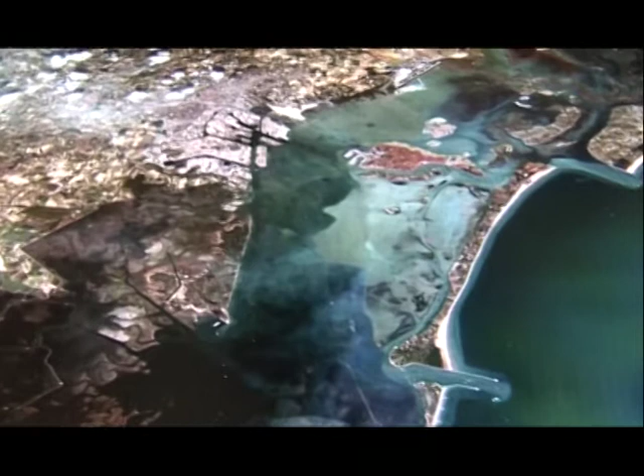Venice Lagoon is endowed with a unique environment in the world, an environment in which man and nature over centuries have maintained a delicate balance. We owe to the Serenissima Republic and its engineers and mathematicians many of the works that have saved this ecosystem from being buried in the mud, carried into the lagoon by rivers, as well as the construction of retaining walls to defend the city against the sea.

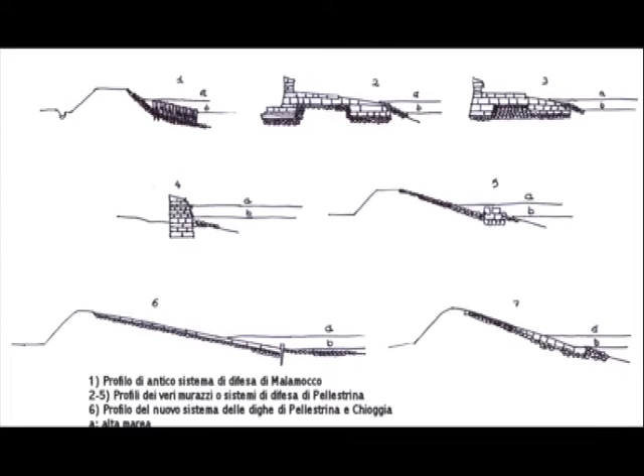But today, Venice is dramatically threatened by subsidence, the sinking of the lagoon floor, and by eustasy, the rising sea levels as the result of climatic changes. The phenomenon of subsidence of an anthropic nature was neutralized by a special decree in 1973. The decree prohibited the extraction of large quantities of water from the lagoon floor for the productive cycle of Porto Marghera's petrochemical plant.

The lagoon, 550 square kilometers in size, is connected to the Adriatic Sea by 3 entrances: the one at the Lido, the one at Malamocco, and the one at Chioggia. The lagoon is not a lake. The lagoon is a living body in which the balance of dynamics can be maintained only if they are looked after every day. The Lagoon of Venice is the only type in the world which has lived for 1,000 years with this balance. It managed to do this because there were certain rules imposed by its government.

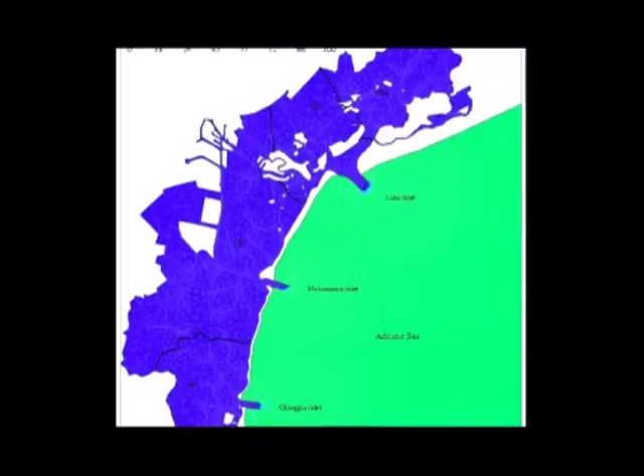This balance between the earth that enters the lagoon from the rivers and the earth brought in by the tides of the sea constitutes an environment that is a kind of natural sponge which stays that way if it is taken care of day by day. Since the fall of the Republic of the Serenissima, this maintenance has been interrupted. Grandiose projects were launched, which in turn initiated the devastation of the lagoon.

The tides last 6 hours. In 24 hours, 4 times. This lasts about 12 to 13 days. Then, in the period of the half moon, as we fishermen call it, comes what we know as dead water, which lasts 2 to 3 days. So, in reality, the danger of high tide periods covers only 1 week. This high water is influenced by the Scirocco winds as far as Venice is concerned, and by the Bora winds as far as the Chioggia base is concerned.

When we have the largest inflow or outflow of water at the 3 entrances to the lagoon, we have a total volume of about 20,000 cubic meters a second going in or out. I always give this example. The outflow of the Po River, on average, is about 1,500 cubic meters a second, and at its maximum about 10,000 cubic meters.

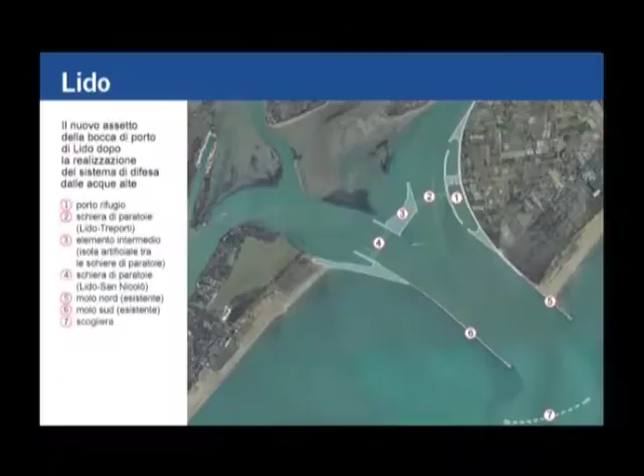The Lido entrance is used to allow passenger liners to pass in and out of the lagoon, and has a depth of about 12 meters. The Malamocco entrance is used for freighters, container ships and petrol tankers, and has a depth of about 14 meters. The entrance at Chioggia is the lowest, about 8 meters, because only fishing vessels pass through there.

Once you increase the opening of the entrances, as the project of the Mose does, then a lot more water enters the lagoon. Of course, it is true. We have high water more frequently now than 100 years ago, and we have a higher sea level. In fact, over the last 100 years, we registered a rise in the level of the sea of about 23 centimeters.

The enlarging of canals, making them deeper, straightening canals instead of keeping to the morphologic course of the lagoon, means you are putting more water into the lagoon, which means exposing yourself to more flow of water coming in and out of the entrances, which means the degrading and removal of silt, a vital component for the survival of the lagoon. 120 to 130 years ago, the entrances were completely different. They were not reinforced, there were no piers, and the depths were far inferior, perhaps 3 to 4 meters only.

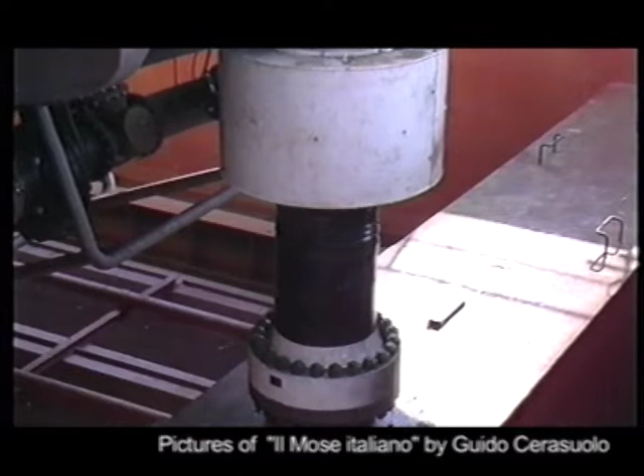The New Venice Consortium is a pool of major private enterprises which has been granted the exclusive rights for all projects designed to safeguard the Venetian lagoon. The consortium has insisted on the use of an impressive system of mobile and submerged sluice gates known as Mose.

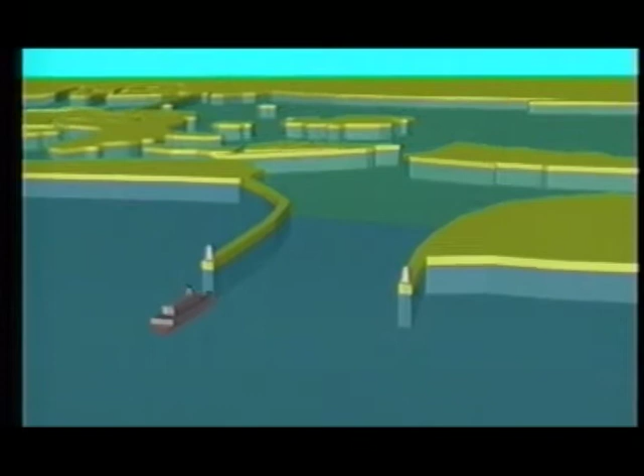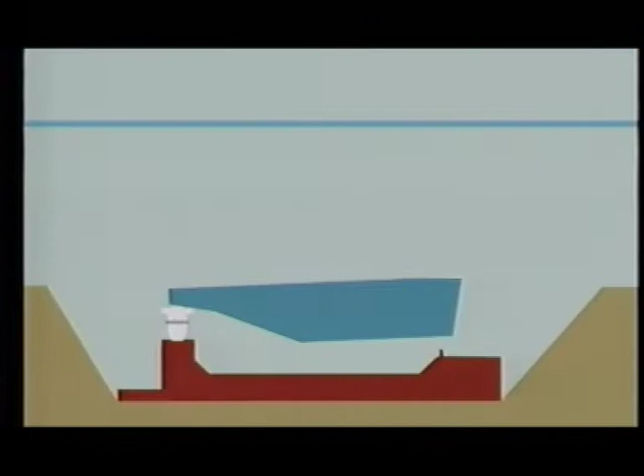These sluice gates, hinged on concrete foundations, will be positioned on the seafloor of the 3 lagoon entrances and during normal conditions will rest on the floor inside container-like structures called caissons. They will go into action when the sea level rises more than 110 centimeters above the average level. With the help of a compressed air system, the sluice gates will be emptied of water, which acts as ballast, and they will rise out of the water on rotating axes.

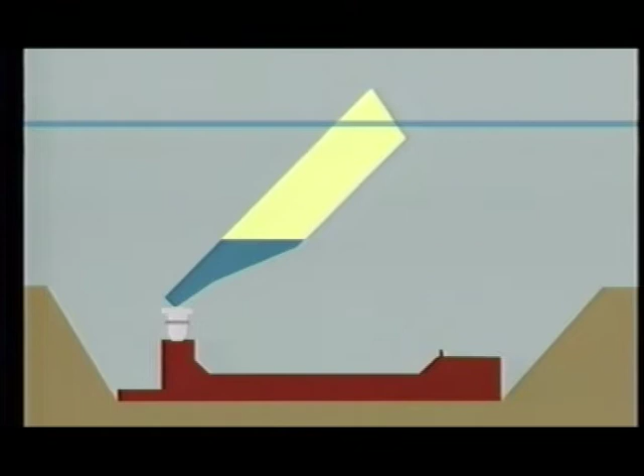It is these rotating axes, already in an advanced state of construction, that have caused more than perplexity among experts, politicians, and ordinary citizens who are opposed to the Mose. Over the last 1.5 centuries, Venice has suffered high water more frequently and always higher. Now, the real problem is to understand why this has happened and to remove the causes.

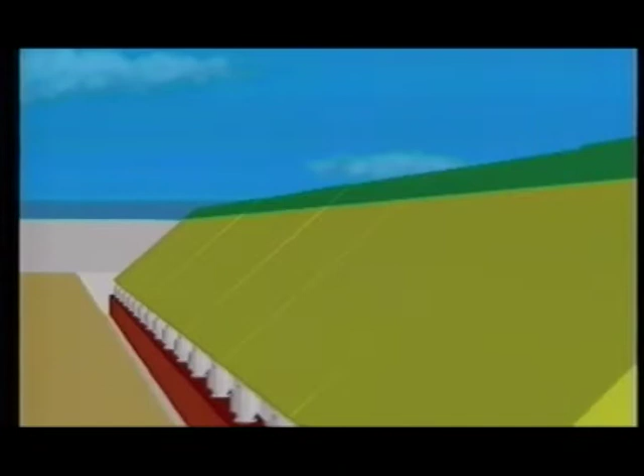The Mose, however, does not ask itself what is the cause, but intends to solve the problem of high water by manufacturing huge sluice gates, which for simplification are submerged and are raised when the level of the sea exceeds 110 centimeters above the normal level. In fact, all the studies by experts and environmentalists show the general conditions of the lagoon, little by little, have been modified as the result of human intervention. High water has become frequent.

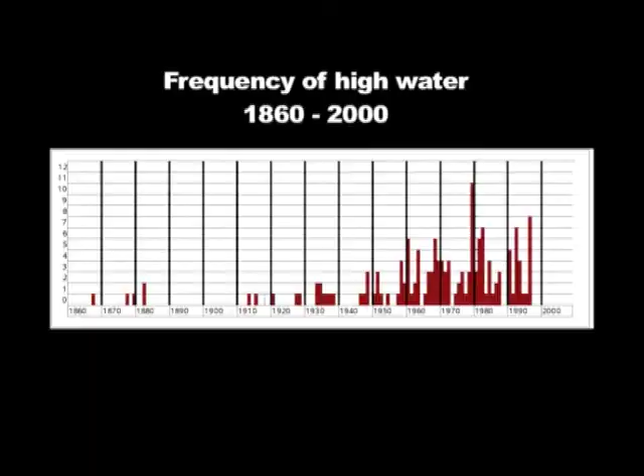This means when we dug out the petrol canal, it became a huge highway for the tidal waves. The same effect when we built the retainer dams on the lagoon entrances and extended the depths of the entrance floors. When we built Marghera, taking away an enormous part of the lagoon from tidal expansion. When we filled in parts of the lagoon to make an airport, and then the first, the second, and the third area of land reclamation, where there is supposed to rise a third industrial zone.

Little by little, as we did all that, the frequency of high water increased for a very simple reason, and that is that the lagoon basin was being reduced in size. We have a sea which every 6 hours comes in and goes out. So if more water comes into the lagoon and the area of water is reduced, the water level rises.

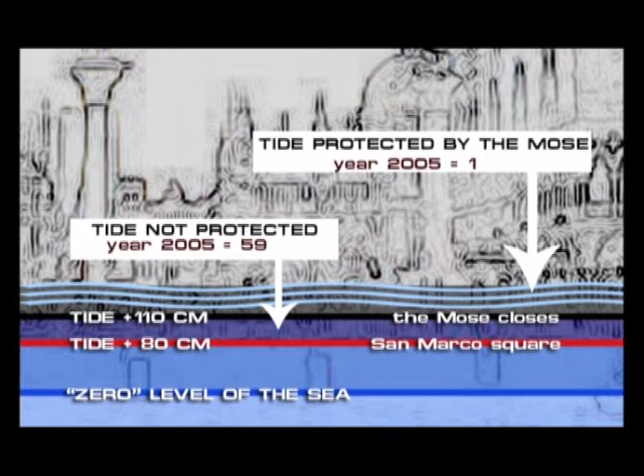I have to explain something. When we talk about 110 centimeter average tide, we refer to a zero average sea, and we don't mean the level of water rises 110 centimeters in the city, which would mean water to our armpits. In fact, with this 110 centimeter tide, we would have water only in the lowest part of Venice, like St. Mark's Square, where we would have about 30 centimeters of water, and in the rest of the city about 10 to 15 centimeters.

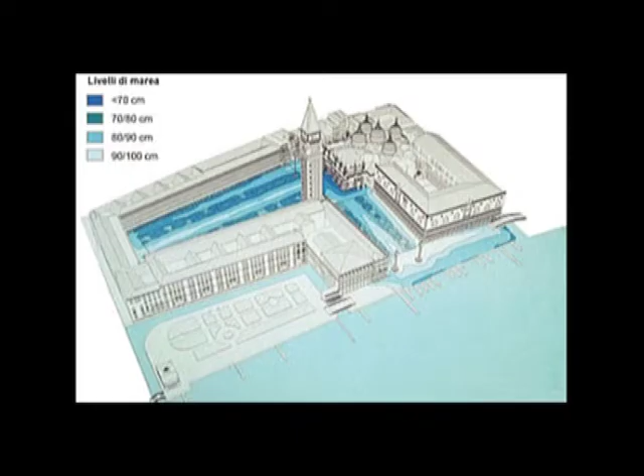Of course, 20 to 30 centimeters of water is a problem for those who live in Venice and have to wear rubber boots, with streets flooded, water in shops and in the ground floors of houses. But this is not yet a flood disaster, as we saw in Mestre Marghera at the end of September 2007. What would have happened if the Mose was closed on that day, and the water would not have been able to exit the lagoon? That would have been a double disaster, both for Mestre and for Venice.

Those against the Mose want to escape this cycle of high water, but we want to do it by removing the causes. Today, there exist 9 to 10 alternative projects, which the municipality of Venice has finally analyzed, confronting one with the other and putting them in front of the Mose. The result was that from a point of efficiency, and I mean by efficiency the degree of protection from high water, environmental impact, cost and time of construction, the Mose ended up in second last position.

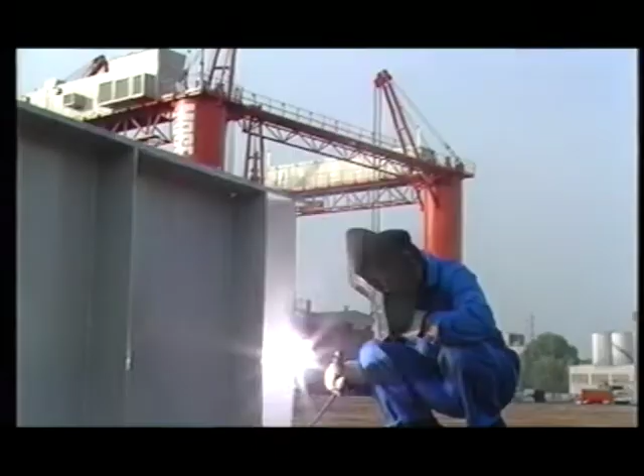One of the most scandalous points about the Mose is that it is not a project born and administered by the municipality of Venice. It is a project tendered out to construction companies for planning, for experimentation and realization, so violating every accepted administrative and economic rule.

But the most fundamental problem of the Mose is that it is an antiquated project, an engineering project whose concept comes out of the 19th and the 20th century. The Italian law, still valid in Venice today, specified 3 conditions adopted from the past Venetian Republic as basis for any intervention in the lagoon. Any project had to be gradual, experimental and reversible. Reversible in the sense that if one saw the effects were negative, it was possible to quickly dismantle the erroneous works, like in the case of the direction of a new canal or a particular shore fortification, etc.

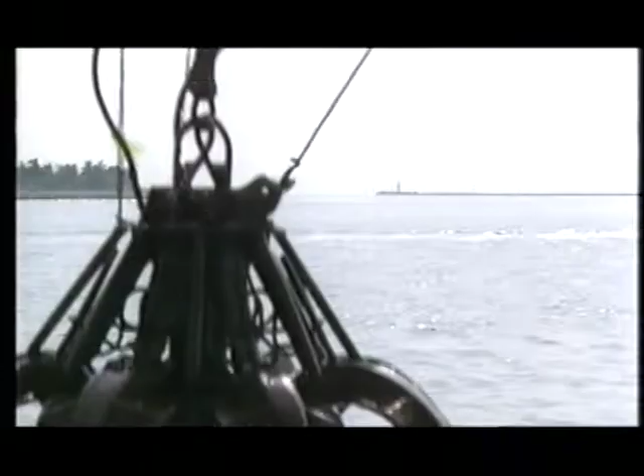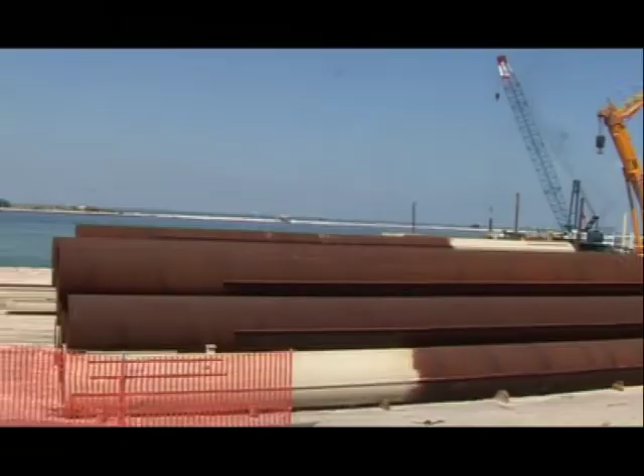The Mose is based on particularly heavy and massive techniques. At the base of the Mose are containers 60 meters by 25 and 15 in height, like a 5-story building in reinforced concrete. These containers holding the hatches of the sluice gates are installed as fixed and unremovable items. The Mose is a permanent project. Just think, the foundations are made up of 12,500 rods fixed below sea bottom at the entrance to the lagoon at a depth of 47 meters.

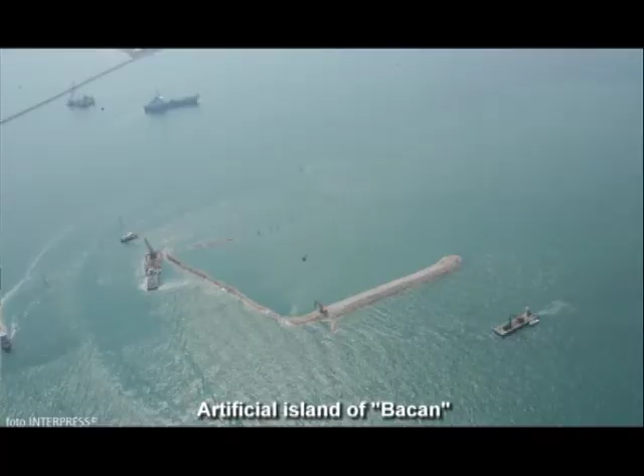Under the lagoon exists an enormous deposit of methane gas. So large, the constructors were forced to build a chimney stack on the artificial island they have built on the Lido entrance to air the methane, which would automatically invade the underground structures with lethal consequences.

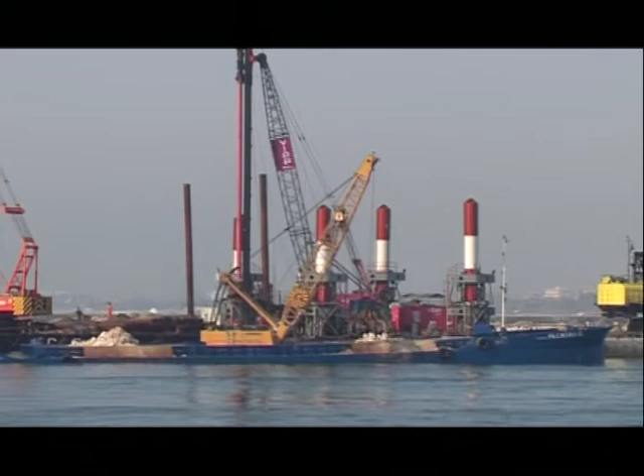Today we are completing the preliminary works of a mega project the size of which Italy has never seen. A project totally illegitimate because it has no evaluation of its environmental impact, which is required by Italian and European law. The works were authorized only by a mechanism of political evaluation, certainly not technical evaluation.

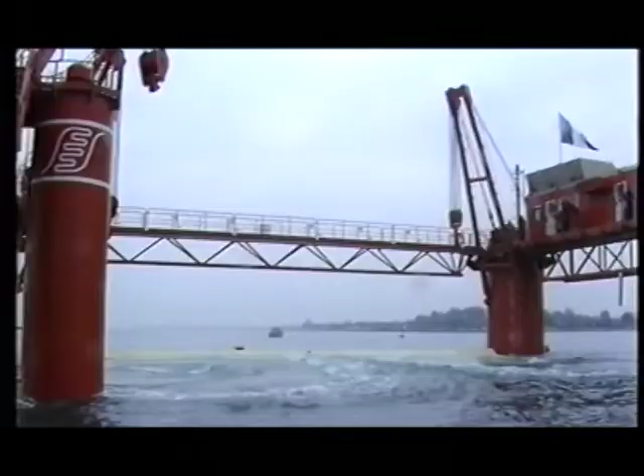The Mose was supposed to be designed in such a way that it would not alter the balance between sea and lagoon. This was done because in no way did we want this balance to be violated or become lopsided during the time when the sluice gates are not in operation. How could we achieve this result? Since the Mose has a flat and cemented seabed, it would be necessary to slightly reduce the openings of the entrances. The volume of water going in and out would therefore remain identical, since the seafloor would be dug out and the entrances reduced at the same time.

However, the velocity of water would considerably increase, as already happened after the creation of the Bacan Island. The speed of water impacts dangerously on the erosion of the seabed and the very foundations of Venice. At times, when the Mose is not operational, the quantity and powerful flow of water will be tremendous. Already now, with the first works, fishermen are saying that the currents have changed. The captains of the passenger ferries have also noticed this. And remember, we haven't even started yet placing the hatches.

The Mose will increase the medium and high water levels and will actually go into operation only when the high tide levels exceed 110 centimeters above the average level. It will only be ready between 10 and 12 years from now, and at the phenomenal cost of 4.2 billion euro.

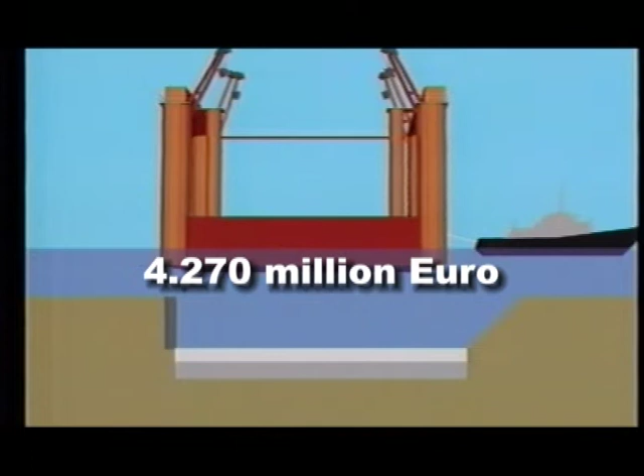Tried out as a model between 1988 and 1992, the Mose was initially financed with 435 million euro. Work officially began on May 14, 2003, when the former Prime Minister Berlusconi laid the first stone. Today the cost estimate has gone up to 4,270 million euro, and the project is supposed to be completed by 2011.

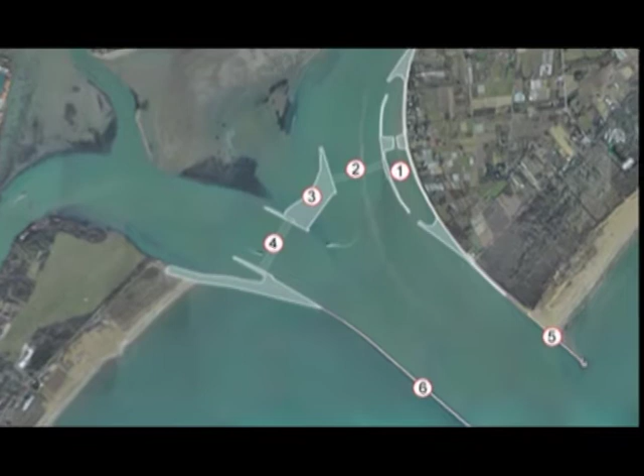The solution envisages 18 sluice gates at the Chioggia entrance, 19 at Malamocco, while at the Lido entrance, twice the size, there is this intermediary element, a real island between two formations of 20 and 21 sluice gates. We are therefore looking at a total of 78 sluice gates, 20 meters each wide, with a total length of

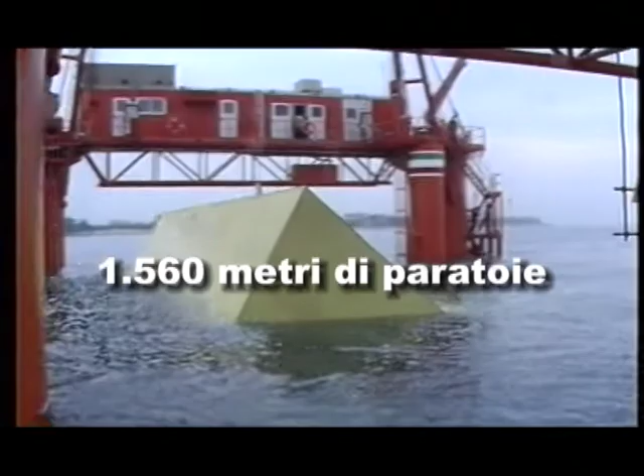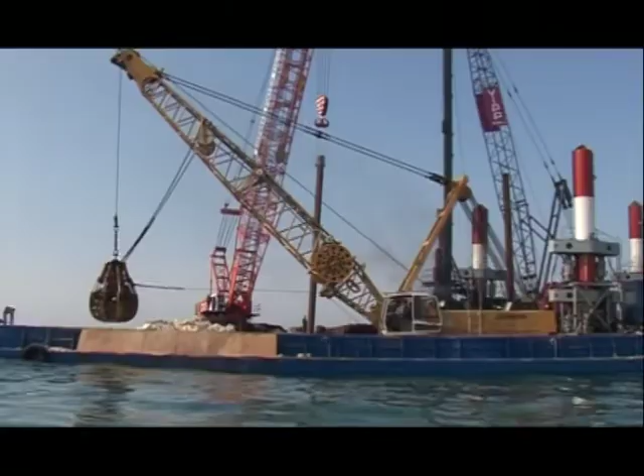1,560 meters, with heights that vary from 18 meters at the Lido and Treporti to 29.6 meters at Malamocco and a thickness variable between 3.60 meters at the Lido and Treporti and 5 meters at Chioggia, depending on the depth of the canal. The average time envisaged for the closing of the entrances is between 4 and 5 hours, including the time for opening and closing the sluice gates.

The Port Authority of Venice has requested a shelter for shipping at the Malamocco entrance for the transit of vessels. This is to guarantee the operational continuity of the port, even in a limited capacity when the sluice gates are functioning. The basin, protected by rocks, will create a shelter of calm water, protected from waves caused by engine power. It'll be located on the southern side of the entrance and is about 370 meters long and 48 meters

wide. At the entrance of the Lido and Chioggia, refuge harbors and small shelters for vessels will allow anchorage and transit between ports for rescue boats and fishing boats when the sluice gates are up. Ship pilots are perplexed by the use of these shelters, especially at periods of high tide.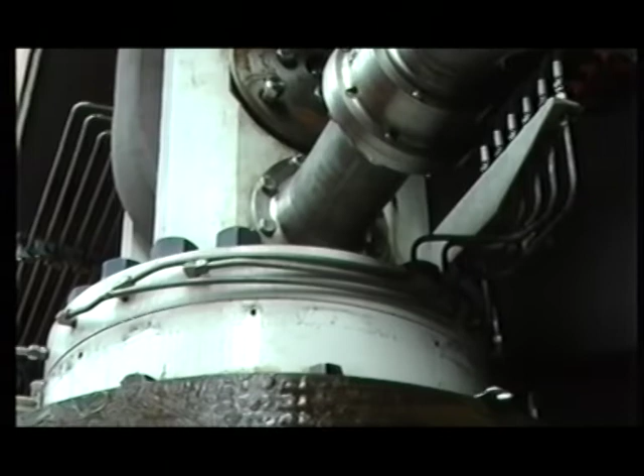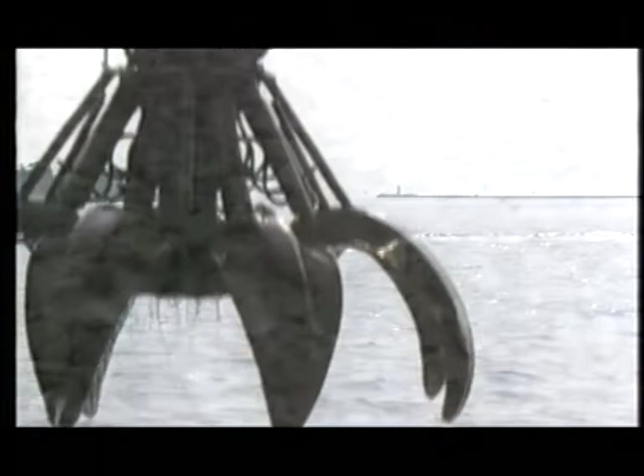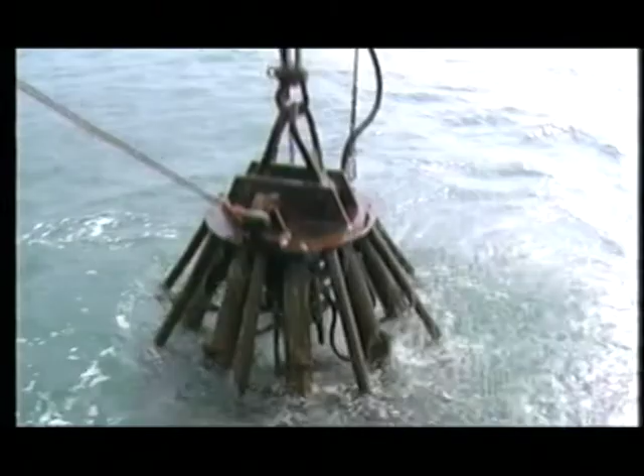Some criticism of the project comes from the cost of maintenance after construction is completed. There is talk of 30 million euro a year for service and maintenance, but no one has ever officially offered a price tag. This number would force the state to shell out a hefty sum each year. Besides, the consortium which has the task to build the Mose is responsible for its functioning only for the first 3 years after its completion. So anything broken after 3 years following the end of the work would fall under the already considerable costs of

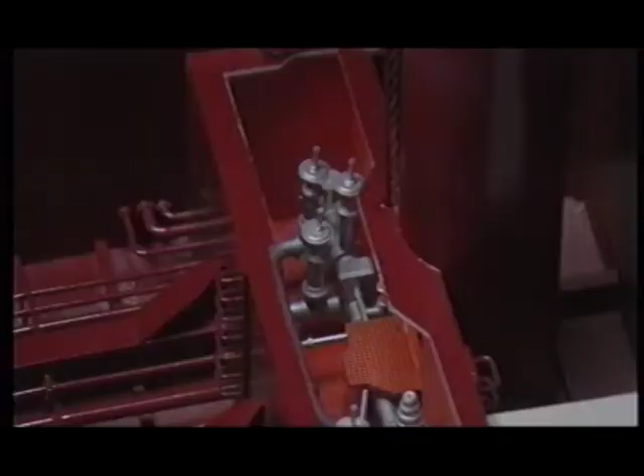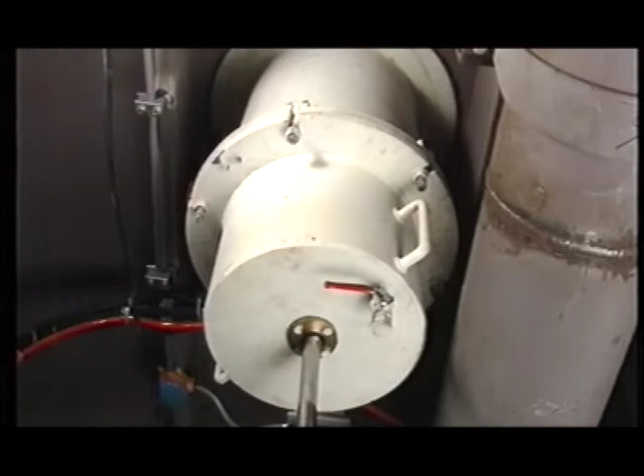running expenses. One of the issues rarely considered is the fact the Mose is based on underwater technology. The entire structure is below water. All the cables, all the transmissions, the entire complex system of running those 78 gigantic sluice gates happens underwater. No one has yet worked out how much the maintenance will cost. And when I say maintenance, I mean the daily running to make sure everything functions. And so far, no one has decided who will pay for it. The real business, I say, and the real damnation is the problem of the cost of maintenance.

International experts, and here we are not talking about the ordinary environmentalists, have said every square meter of the structure which remains underwater all year round will accumulate about 24 to 28 kilos of fouling. These are the incrustations of seaweed, which we call peocci, and shells. Apart from making the entire structure heavier, they must be removed because they tend to block the metal frame, which is the most delicate part.

For this task, it is envisaged as part of the project that each year a certain number of metal hatches are taken off and substituted by a vessel built especially for this removal task. Of course, this will have exorbitant costs.

The engineer Scotti, who designed the Mose, continues to tell us whatever the envisaged level of the sea as the result of climate change, up to 1.5 meters, the Mose will be able to cope. Sure, the huge hatches will rise and descend. But the real problem are the 150 to 160 days a year when the entrances to the lagoon are closed, which means we will drown, I am sorry to say, in our own shit.

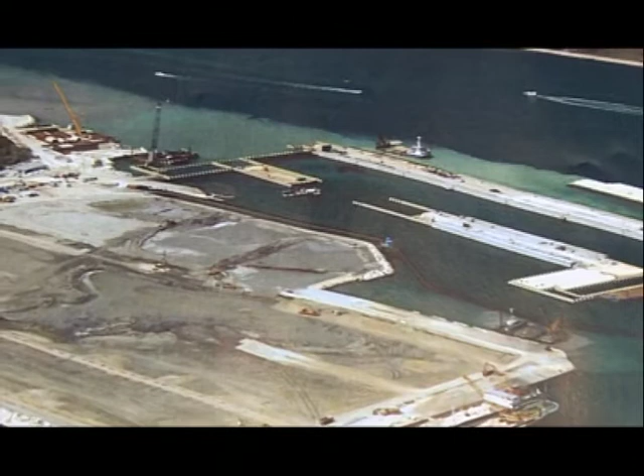The devastation has already begun. It's enough to go to the entrances at Santa Maria del Mare, to Caroman, to the Alberone, to San Nicolò, to see what's already happening. In these places, the workshops of the Mose assemble these prefabricated structures, which are the size of a palace and 5 floors high.

They're assembled in a protected area, in an area under global care, as a reserve of nature. And that's only one example. For the construction of the enormous caissons, 60 meters long, 25 meters wide and 15 meters high, and for the preparation of the entire system, they have opened a special workshop in the Santa Maria del Mare area near the Malamocco entrance.

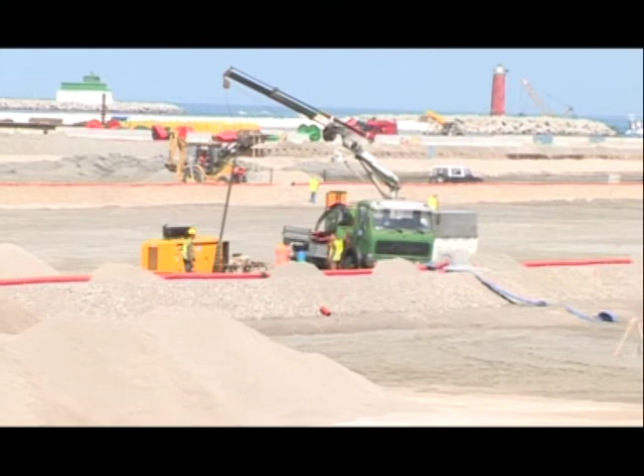The caissons weigh 12,500 tons each. In order to rest on the seabed, a construction of this size, they have to build a massive foundation. Here we see the construction of an embankment with material dug out of the entrances and sand from the seabed. Then everything will be covered with small stones, and then with bigger rocks, and in the end everything will be cemented over in the entire area.

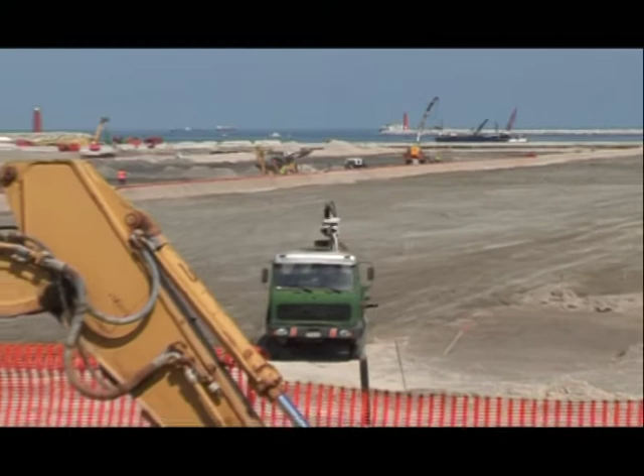They are planning to drop cement over 20,000 square meters. And we know it will be impossible to ever regain the original look of the land, since the removal of 20,000 square meters of cement will cost even more than the cost set aside for the original work.

In May this year, 2007, the Naturalistic Observatory of the Lagoon of Venice, part of the municipality, presented a study on the damage caused already by the workshops of the project. These are damages of considerable extent.

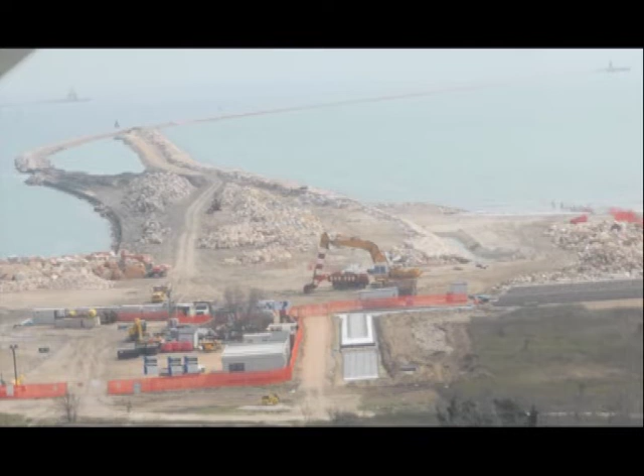On the entrance to the Lido Canal, they built a shelter for shipping on a 3-hectare area labeled an Area of European Community Interest. And they built it without asking for authorization from the European Community. The construction of the artificial island on 8 hectares has played havoc with the flow of water from the Lido entrance.

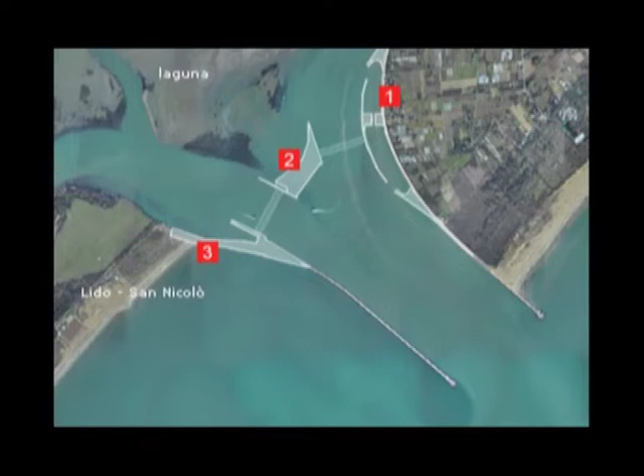At the Malamocco entrance, they built a shipping shelter, also taking over an area of extreme interest to the community, both on the Malamocco side and the side of Santa Maria del Mare.

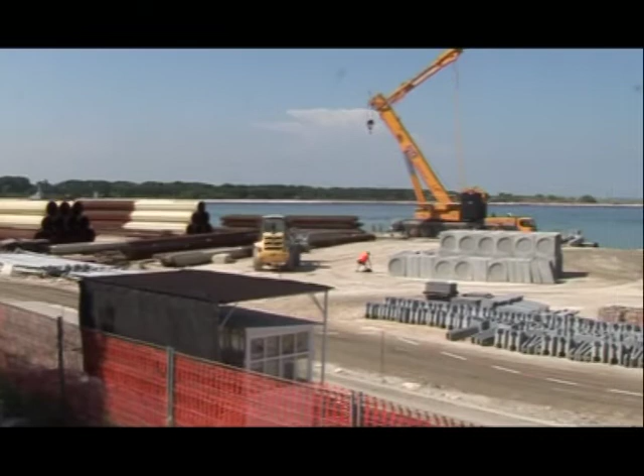The workshop doesn't directly touch this site, but it is an adjacent area which legally should be in possession of an environmental certificate granting permission for a workshop.

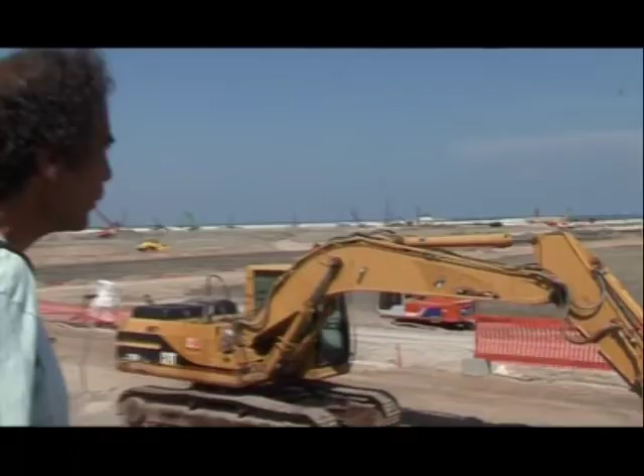One of the issues never taken into consideration is the fact we have a huge environmental impact in the areas where all the material is being dug up. In Istria, they have opened 9 quarries or have reopened closed quarries in order to obtain the enormous quantity of material required for the entire Mose system.

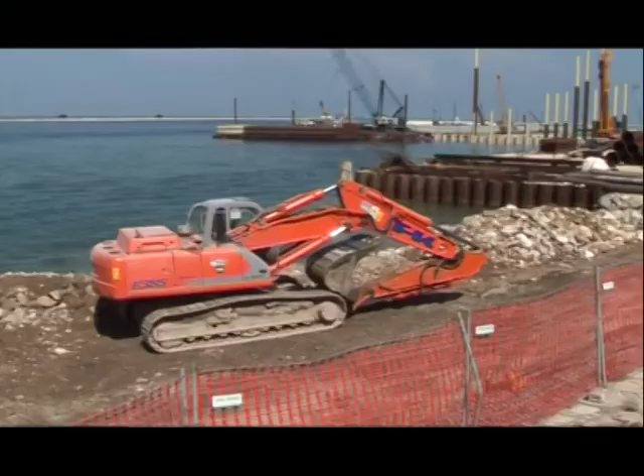I'm also convinced that the abnormal growth of Japanese seaweed and local seaweed, which we are witnessing these days, is not only connected to the annual thermal changes, but the activity of the workyards in operation and their great movement of mud. This is something that also happened during the excavations of the Petrol Canal.

Conservarla. With these interventions, all of them inside the lagoon's ecosystem, they are following a vision of the 1900s, which tampers with the lagoon and destroys its entire ecosystem. For example, where are you going to dump the 5 to 8 million cubic meters of mud, which will be excavated from the seabed at the entrances to the canals, in order to install the foundation on which the containers of the Mose will rest?

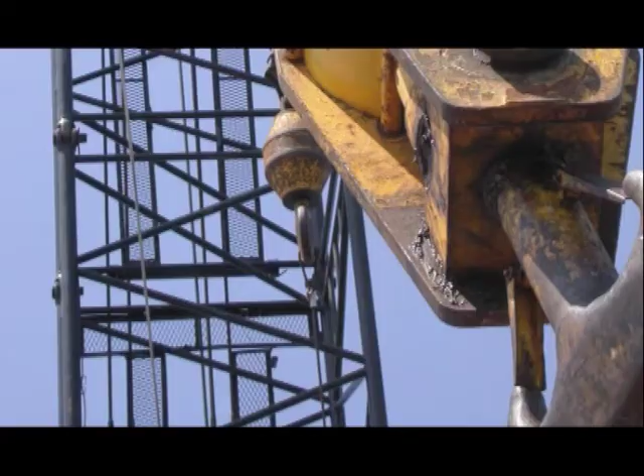This is an important problem. A problem which the new consortium of Venice has so far evaded. And these excavation works on the entrances still have to begin. And when these works begin, we will be effectively at the point of no return. In other words, once you lay hands on the foundations, you cannot turn back and propose an alternative solution to the Mose.

They want to pass this off as a reconstruction of the morphology of the lagoon, of its sandbanks or shallows. But in reality, this is a project of immense waste disposal of the mud excavated for the Mose from the lagoon entrances. They have asked the Commission of Safeguarding Venice to be allowed to rebuild the sandbanks on the site of the Marani Canal, between the islands of Vignole, Murano and Saint Erasmo, sandbanks which have never existed.

It's enough to consult the hydrographic charts of the lagoon from 1935 to these days to see that in that area there were never any sandbanks. In reality, the consortium wants to dump right there its first mudloads from the excavations at the Lido entrance.

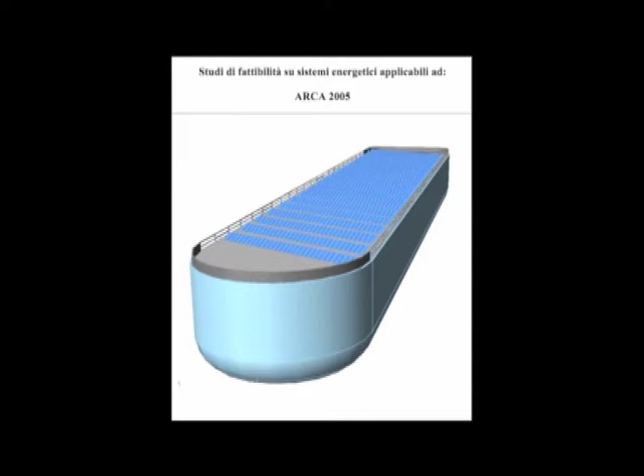During the summer you wouldn't see anything, but when it's autumn and winter, the ships come to the entrance of the canal and are sunk and filled with water. The sluice gates rest on the sea bottom and are raised when it is necessary. Understand this. By simply inverting the sluice gates through this gravity dam project, we can cut the cost by 75%.

The Mose consumes so much energy, they have to build an electricity station to ensure it can operate, which means the project sucks up a lot of energy. It doesn't use the tidal flow to produce energy, nor does it make it possible to use this method in future. Therefore, the Mose is an antiquated project, not at the level of our times. In view of the water coming in and out of the lagoon entrances every 6 hours, can this tidal flow be used, according to you, to produce electric energy?

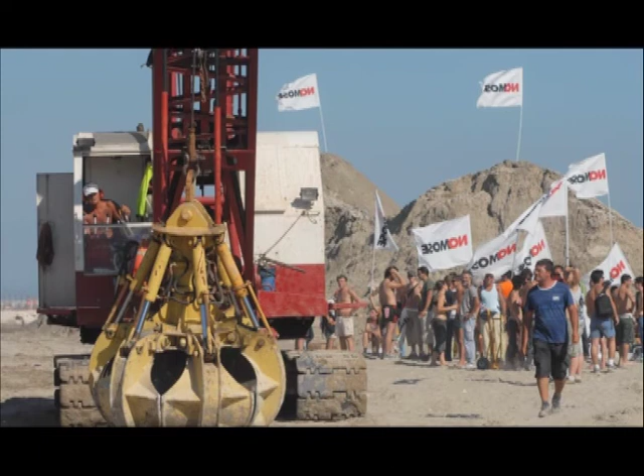Because all the monies thrown away on the Mose are stolen public monies, snatched from the special law for Venice, the contributions for the restoration of homes, the contribution to rents, to all those actions which truly serve to socially safeguard our city. We have the sacrosanct right and duty to block the Mose, knowing fully well that nothing will come from the official politics and no one will help us from the palaces of power.

Something our brothers also know. Those who fight against the expansion of the US military base Dal Molin in Vicenza, or against the TAV in the Val di Susa, or the dozens and hundreds of big and small projects which devastate our country. From Berlusconi to Prodi, all of them have united to complete these major projects, whether they are for war, for a tunnel, or for an underwater dam. We know fully well that the only way to block these projects is to block the work process.

In conclusion, we can say the Mose is an extremely costly project in its construction, its functioning, and its maintenance, with a high consumption of energy. It will destroy the delicate ecosystem of the lagoon and will choke the exchange of water, vital for the productive functioning of the lagoon's habitat. It is the worst possible project. Substantially, it is a mistake which makes persistence with the works of the Mose evil. It must be stopped.